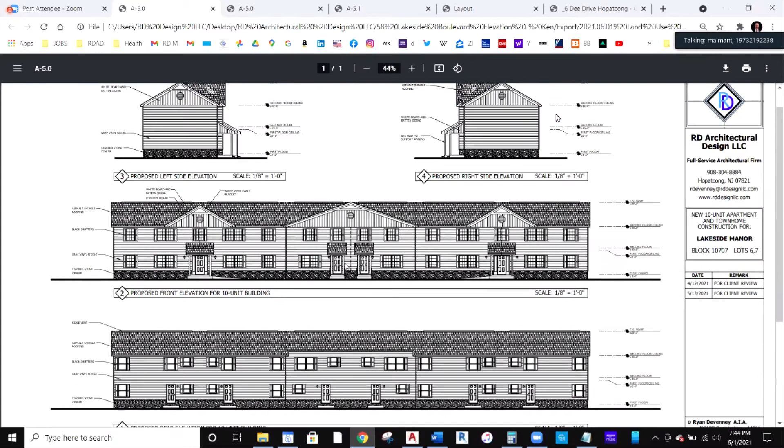Okay, thank you. I've got no further questions, Mr. Chairman. Okay, thank you, Mr. Malmant.

What is the pleasure of the board? Anybody have comments, questions? They don't pass the back of the building, cars, right? No, not directly, but as you're passing the building, you can get a glimpse of the rear facade.

So now that has been addressed. Those are the only changes, correct? Yes, correct. No building profile. Overhangs, nothing else that we asked for, or I asked for. There have been no updates to the footprint of the building.

Okay. All right. Any other questions or comments? Are we allowed to ask a question that doesn't relate to the back of the building? Sure, yes, we're discussing the entire project now. So I have a quick question.

How many, by the math, I assume that there are 24 apartments. Is that correct? 16. There's 10 units in the rear building. No, the total project on 2.5 acres, how many apartments is that? I think it was 17 or 18 units total.

You've got 48 parking spaces, 2 parking spaces per apartment. That's 24 apartments. Is that right or wrong? Hold on, let me check my notes. Yeah. I think we went over this. Mr. Blaney is on, he can help us with that.

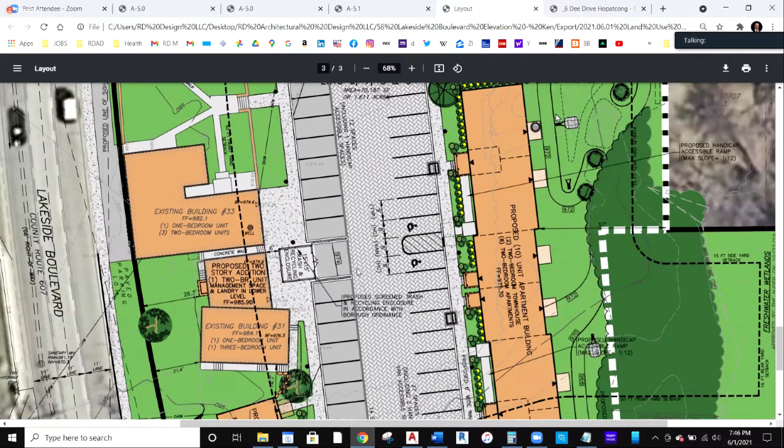So my next question is, multiple of those units are more than 1 bedroom, is that correct? They're 2-bedroom apartments? All of the units in the 10-unit building are 2-bedroom apartments. And several of the other apartments are 2-bedroom apartments, is that correct?

There are, if I may, there are 1, 2, 3, 4, 5. 5 of the units are 1 bedroom. So 20 units are 2 bedrooms or more, is that correct? 19 of the 20 units are 2 bedrooms and 1 unit is 3 bedrooms.

Okay. How many children do you think will be living in those apartments? How many children? Yep. I have no idea. I can tell you that right now in the existing property, as it exists now, there are 2, 4. There are 4 children, 2 toddlers, and I think that's it. I think there are 4 children there.

So are these questions going toward parking spaces? Is that what we're looking at? No, this is not going to parking spaces. The question is leading towards, what provisions are you making for multiple families, with as many as 20, 25 children potentially in that property.

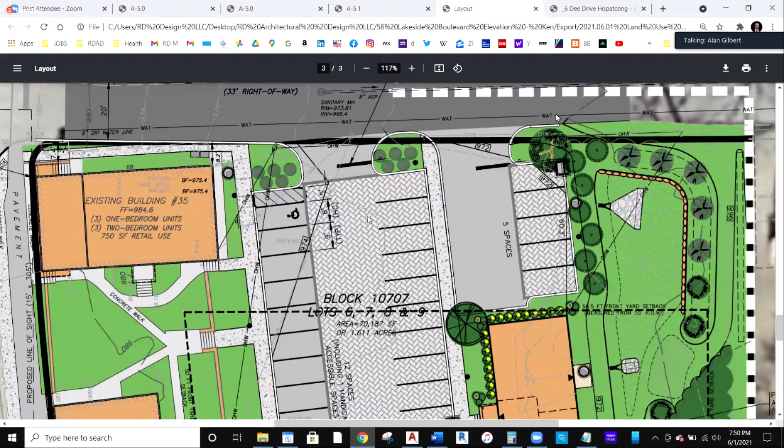Okay, that's it. Any other questions? Yes, I have a question about the parking. I brought it up last time, the size of the parking spots. I'm looking at the 5 spaces in the back now. I wonder if it's possible to reduce that to 4 spaces, which are 10 feet wide instead of 9 feet wide, and have a sign back there for large vehicle parking.

As I pointed out last time, I have a large vehicle, and parking is a problem when I only have a 9-foot wide spot. Mr. Gilbert, if I may. Understood. Good.

After the last meeting, I went across the street to Smiles and I measured the parking spots there, and they were only 9 feet wide. And that was very recently passed by this board. I then got in my van and I drove over to Mariners Point, at which point I measured those parking spots as well. They're all 9 feet as well. So I don't understand why I'm being treated differently than these two very recent approvals.

You waived those standards the last time, when those two applications were before you. Those two applications were a couple of years ago that I don't consider very recent. Well, what's more recent than that? Because I'll go measure those parking spots.

Well, every plan is treated separately. That's all I have to say about it. Well, in all due respect, sir, I think you're being unfair to me. Okay.

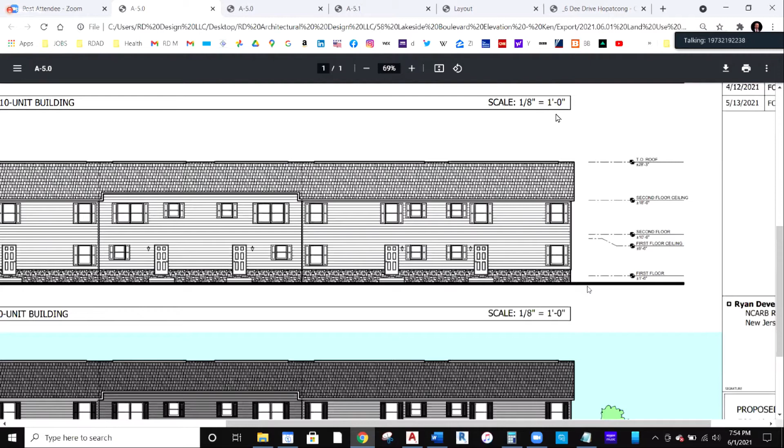Yeah, I know, so it's 28 feet. Well, it's 28 feet plus about another 2.5 feet, so I would say 31 feet from the grade to the top of the roof. And I would say the wetlands are maybe slightly below this grade line, maybe 1 or 2 feet, but we're still underneath the 35-foot height requirement.

Oh no, yeah, I totally get that, because you're doing it from that location. I'm just talking from a visual perspective. You're saying it's 1 to 2 feet lower at the swamp than it is. The site is fairly flat, so it couldn't be more than a couple of feet.

Does anybody know? This is the site plan. Right, I only see a couple of contour lines on here, so it can't be more than a couple of feet.

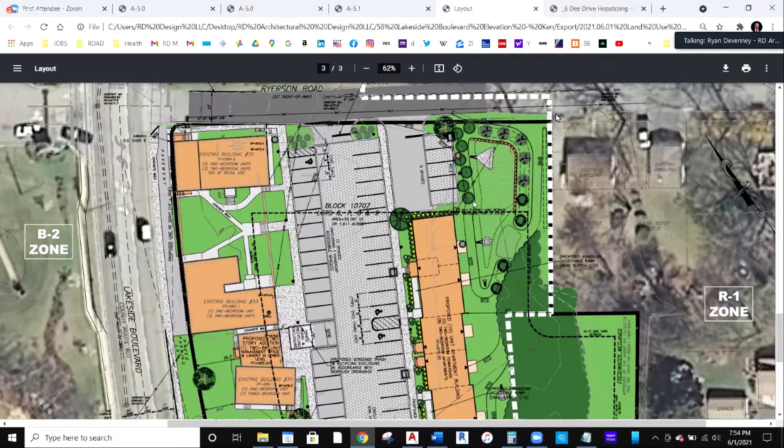And how long is this building? The total length of the building? Yep. The total length of the building is 176 feet, 7 inches.

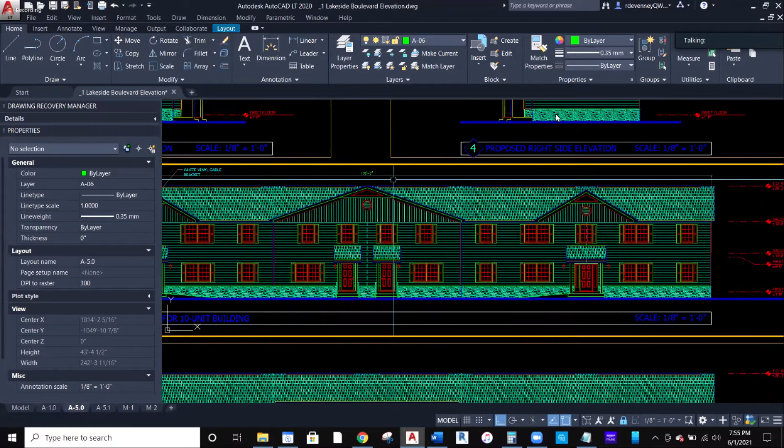And how big is the piece of land, how wide is the piece of land that it's going on? Approximately. I don't have an immediate answer for you on the width of the lot, but this is the site plan. Well, you have the setbacks of each end of the building, right? So that would give you your answer.

Any other questions? So the other, well, somebody actually brought up Mariner's Point, and I thought that was an interesting point, because how many acres is Mariner's Point built on versus 2.5 acres over here? Does anybody know the answer to that question?

Yeah, I don't see the relevance, frankly. Well, somebody on the board brought Mariner's Point up, so I have the right to ask that question. It's approximately 10 acres. 10 acres? Yep. Thank you.

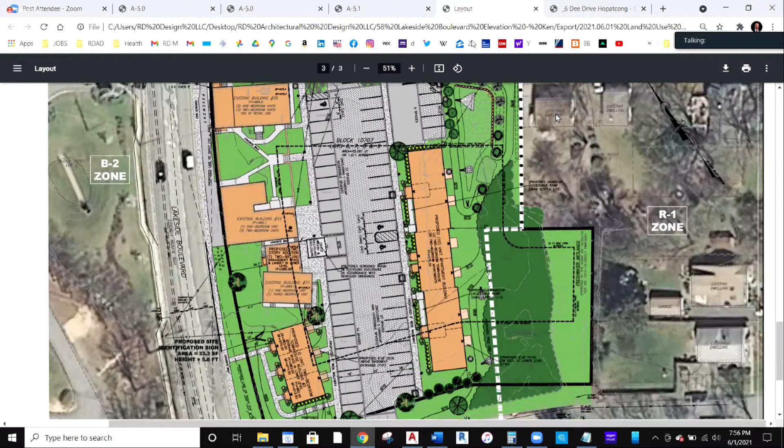Are there any other questions or concerns that people want to ask this applicant? Ron, do you see anyone? Colleen Lyons, Ms. Lyons, and Mary Modes was up as well. Okay, I called Colleen, so let's do Colleen first. Colleen, you're up.

You're muted, can you hear me? There you go. Ms. Lyons, please raise your right hand. Do you swear the testimony you're about to give will be the truth, the whole truth, and nothing but the truth? Yes, I do. And you're speaking on behalf of the Lake Hopatcong Coalition? Commission, yes, that's correct.

So the Lake Hopatcong Commission reviews land use board applications within the watershed, and then makes recommendations based on impervious coverage and things that could impact the water quality of Lake Hopatcong.

So our planner did review this and commented that this property is presented as mixed commercial, where the impervious coverage requirement would be 65%. But in reality, it's functioning more like a multifamily with one commercial unit, which would typically be 40% under the R1A or R2T zoning requirement. Also, it seems like an overutilization of the property with 26 units on 1.6 acres.

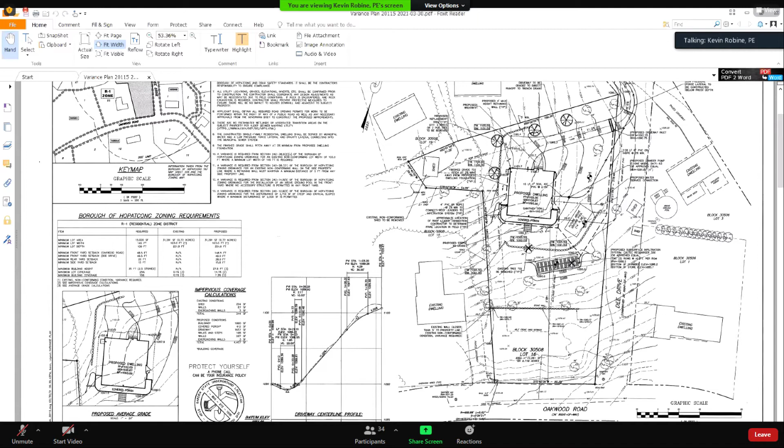A couple other improvements that we're looking to do, maybe not immediately at the construction of the home, but there is a desire to have an above ground swimming pool. The applicant has a few children and is looking to have an above ground swimming pool on the property, which has a variance associated with it. As D Drive is an unimproved right of way, it's still a public street, so it would technically be located within the front yard of the property. Similar in nature to the adjoining property, they have an above ground pool in similar locations. We're looking to maintain 15 feet of setback from the front property line for any proposed pool.

Water and sanitary sewer services exist in the Eugene Place right of way, and we're looking to connect to those municipal services in order to provide the home with potable water and sewer.

Regarding the variances we're looking for: for the existing non-conforming lot width, under section 242-38B2A, which requires a minimum lot width of 145 feet, we're at 103 feet. This represents an existing non-conforming condition. Letters were sent by Mr. McCarthy to adjoining property owners, the so-called Nash letter, to determine whether any interested parties wanted to purchase property or give land to help alleviate the nonconformity. I don't believe there were any responses to that.

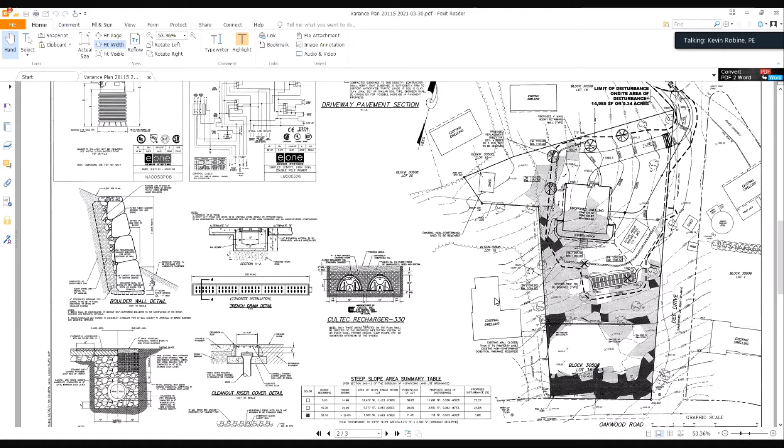The main concern during development and design of the stormwater management plan is to not impact adjoining properties or adjacent roadways. We have two adjoining properties, Lot 3 and Lot 1, to the east of the property, and Oakwood Road to the south, where stormwater runoff flows via sheet flow across the property and into the adjoining properties. That exists under existing conditions today, and it also flows down to the south to Oakwood Road.

So what we had done in our calculations, which were submitted in response to Mr. Rushke's February 2nd letter, was to analyze the stormwater runoff to each one of these properties and the right-of-way separately to ensure that we don't have any impact to those properties.

In order to demonstrate no impact, we have our shallow infiltration system located in the central portion of the property. That is going to pick up roof leaders and the majority of the driveway leading towards the Eugene Place right-of-way. There'll be a trench drain still on the property, as close to the property as we can without getting into the right-of-way of D Drive, and discharge that stormwater to the shallow infiltration system, the subsurface infiltration basin we've designed. Essentially that cuts off runoff that was currently flowing undetained to adjoining Lot 3 and adjoining Lot 1.

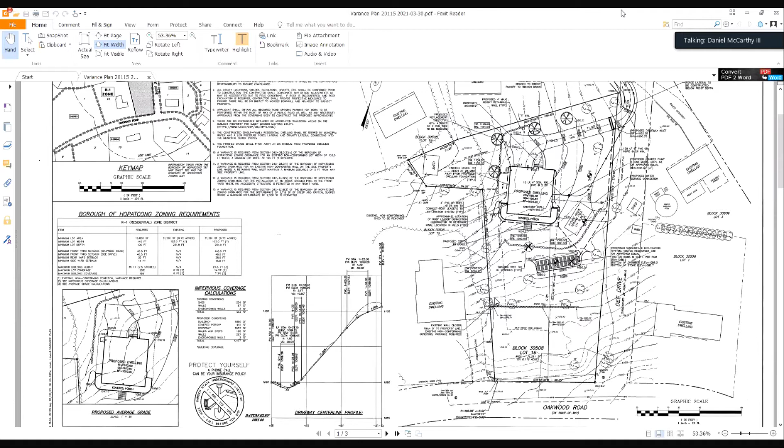Okay, anybody else from the board? Thank you, Mr. Robine. Back to Mr. McCarthy: I would just ask Mr. DeVecchi if he's still with us and has anything to add. No, thank you very much, I don't have anything to add.

Any questions or comments from the board? Do we need to see the design of the house or not? I believe we did submit architectural plans with our package. Yes, they did. So there are architectural plans, maybe I saw them. The full architectural set - bedroom 1, bedroom 2, master. Yeah, it's a 3-bedroom. I have no question about it, I just wanted to confirm. I have them, yeah, I have them too. They were part of our submission. We all have them, you all got them.

Any other questions or comments from the board? Seeing none, I will open it to the public. Would anybody from the public like to comment on this application? Please raise your hand using the reactions at the bottom of your screen. Oh, we got one - Mr. Weiser, Robert. You want to raise your hand and be sworn in by our attorney? Mr. Weiser, do you swear the testimony you're about to give will be the truth, the whole truth, and nothing but the truth? I do, yes.

Okay, does anybody want to comment on that? Mr. Robine, is there anything you would like to add in response to Mr. Weiser's concerns?

Yeah, obviously stormwater management is a concern with any development property or project. And that's why we specifically looked at the adjoining properties and also the Oakwood Road right of way to ensure that we didn't increase the peak rate of stormwater runoff or the volume of runoff leaving the site.

In order to address those concerns so that there are no impacts due to the proposed development on your property. So where's the guarantee that I'm not going to get washed out by disturbing 3,800 square feet versus what the town allows us to do of critical slope disturbance?

I mean, the assurance is in proper design and utilizing our engineering judgment and design philosophies in order to capture that runoff and infiltrate it into the ground rather than have it run off through the surface. As far as the analysis, based on our calculations, it should not increase any runoff to the right of way.

If you're experiencing any kind of current runoff situations from the road entering your property, that might be a consideration for either an asphalt curb or something that may need to be in place so the roadway runoff doesn't impact your property. But it's certainly not going to be increased by what we have planned.